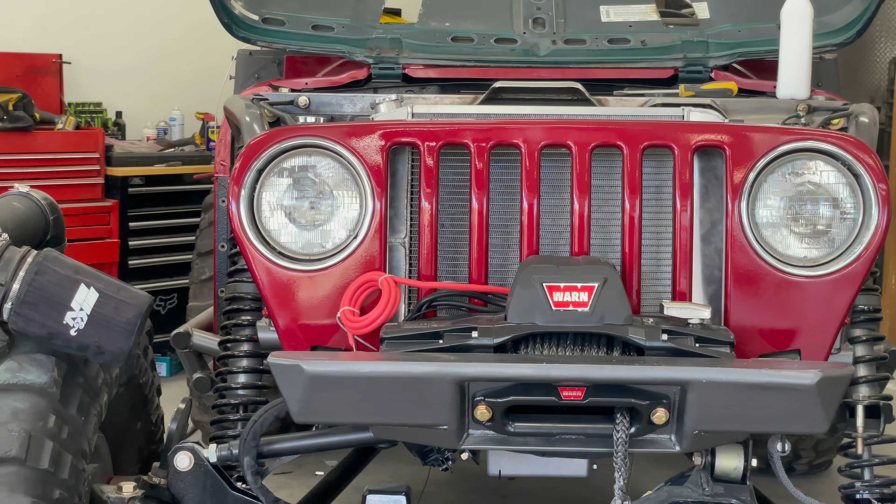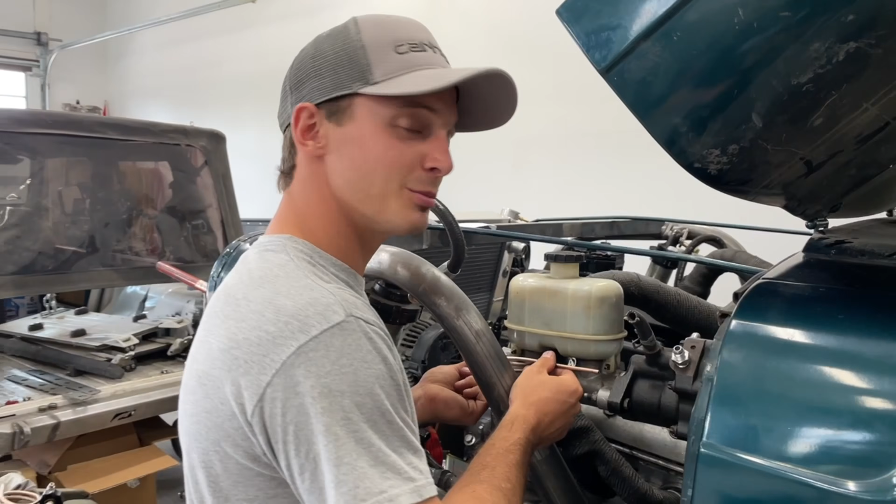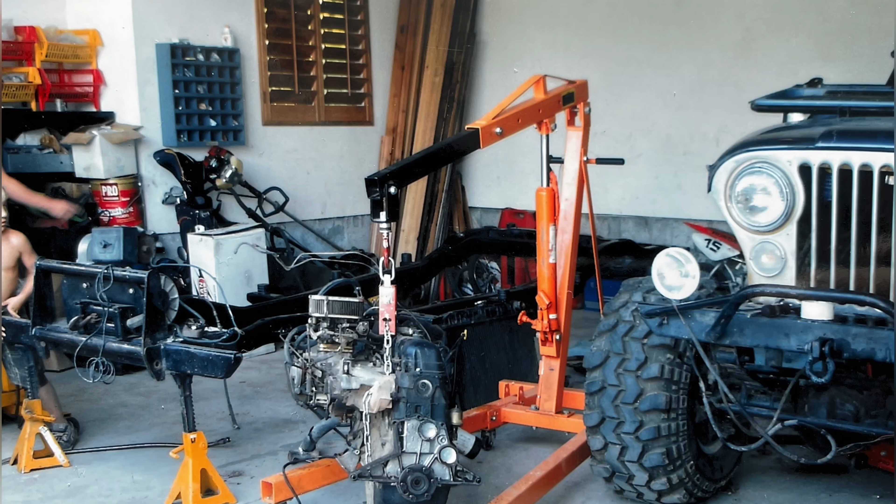My name is Caleb Peck, and these are my two brothers, Brady and Alex. We were raised in the back seat of a Jeep, and ever since we were little kids, we've been obsessed with anything that has to do with off-road. Since we were old enough to turn a wrench, we've been building our own Jeeps. All the building, buying, selling, and wheeling has kept us close through the years. So here we are telling our story in hopes to inspire others to get off-road. You're watching Peck Brothers.

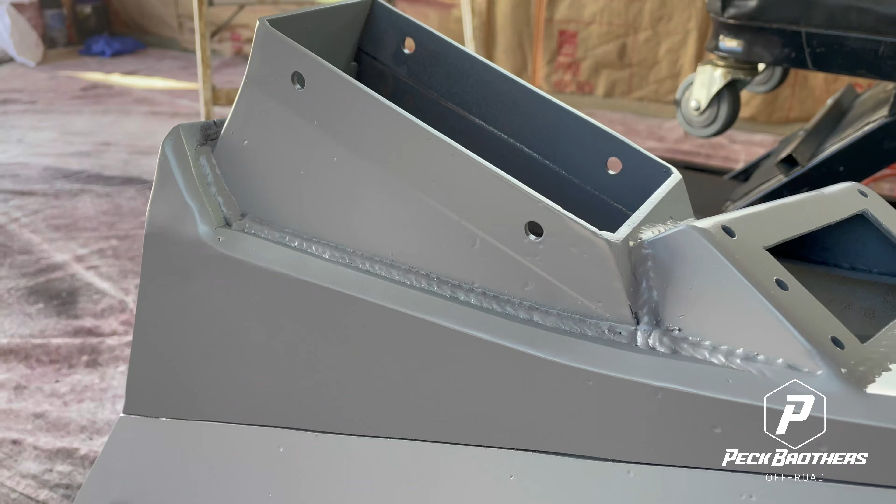All right everybody, it is day 16. There's 16 days till we leave for Moab, Utah. I'm working on this center console. She's primed, but I gotta do some body work. There's a couple little places you can tell where there's some imperfection in the steel, and right here you can tell. So I gotta fill all those with some of man's greatest creation, Bondo.

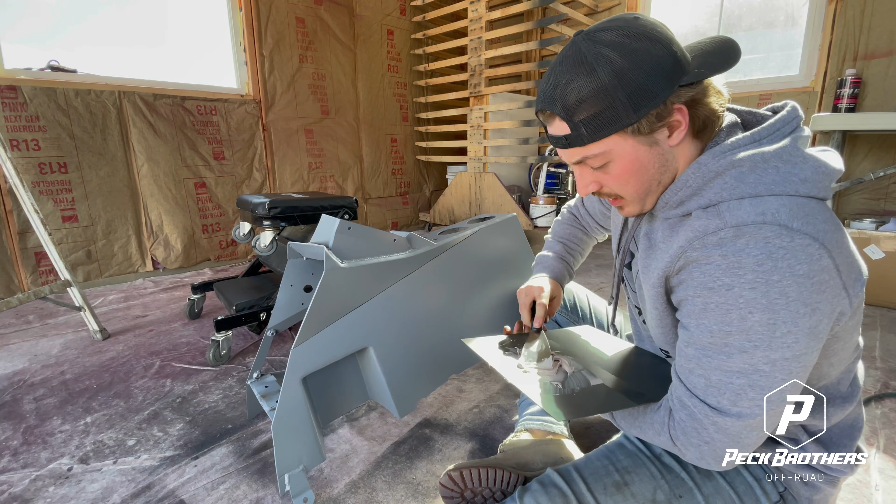This kind of makes me feel like Bob Ross. The only difference between me and Bob Ross is Bob Ross knows what he's doing, I'm just showing you what I'm doing. This ain't a how-to, this ain't nothing, I'm just showing you what I'm doing here.

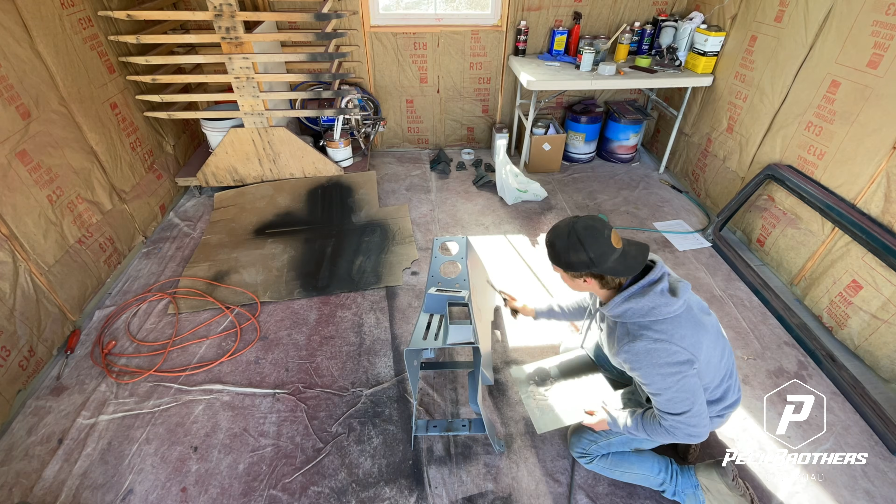Well, while this thing is drying, I guess I don't really know what you call setting up. The Bondo has to harden so I can sand it. While that's doing what it's doing, I'm gonna go work on the Jeep.

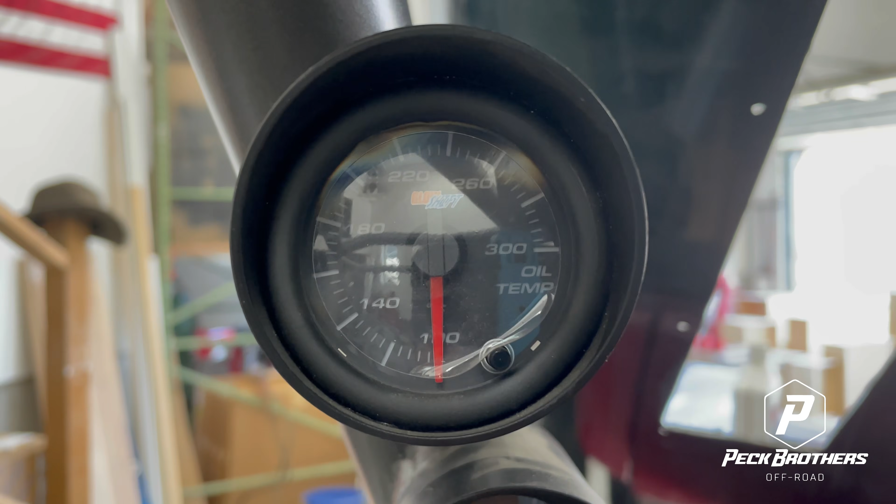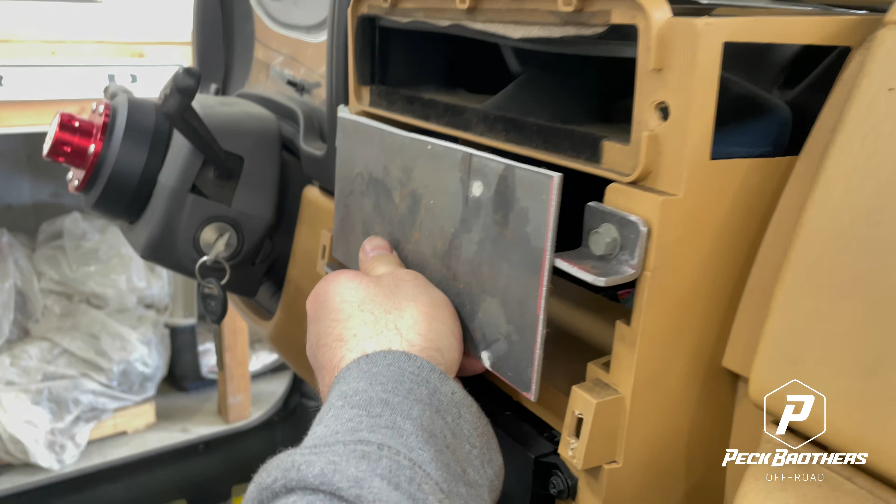So I have these stock gauges here, and I have this one here, oil temp, tranny temp, and air pressure. I think I'm gonna put more gauges in here, so I gotta build something that'll be able to house three gauges in here. I made these little tabs, they're gonna hold this piece that I made, and then another piece of aluminum is gonna bolt to this. So I gotta get this in place and tack this on.

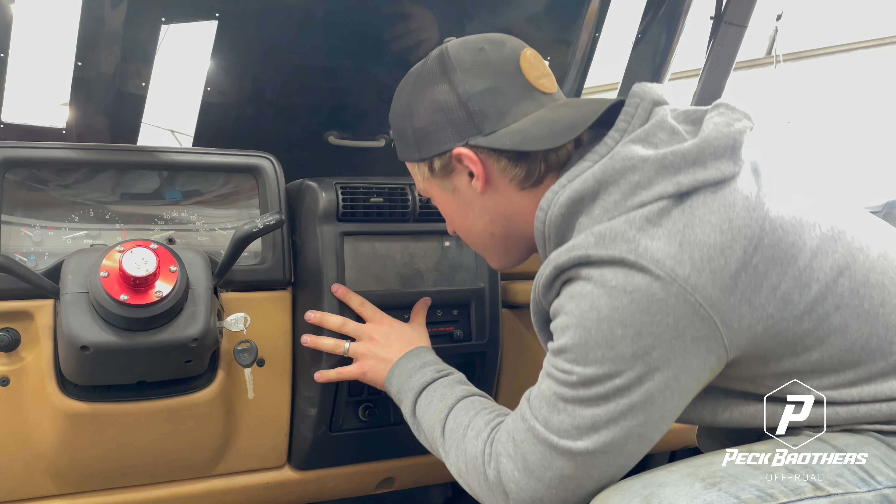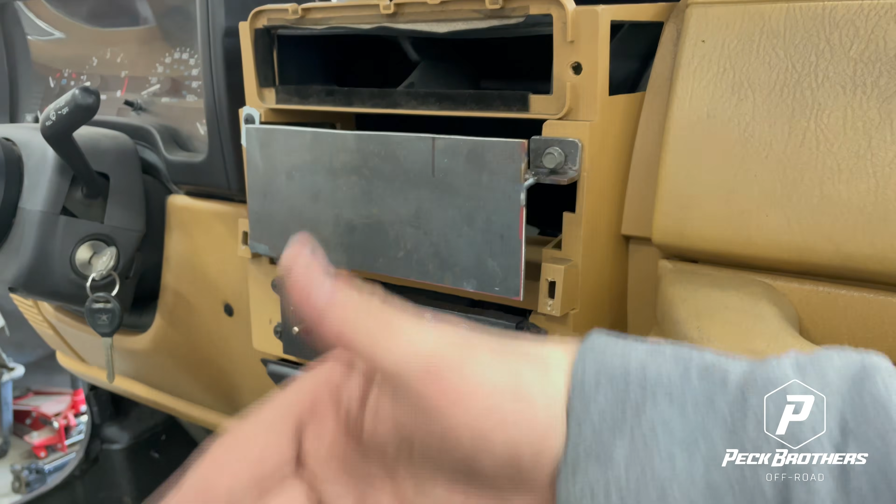Perfect. So now I just need to make an aluminum piece that goes right in this bezel here, and then I'll hook the aluminum piece to this so I can take it off without having to pull this whole entire bezel off. It makes it a super big pain if my center console's in and I need to get to these gauges and pull them out. I want to be able to pull this whole panel that holds the gauges out, so I gotta make this aluminum piece.

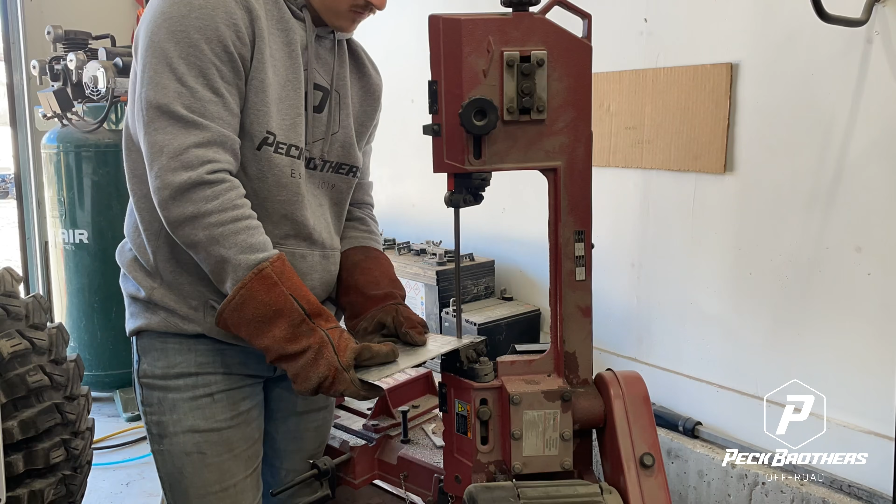Tomorrow. I got pulled away from the Jeep yesterday, and I know crap like that can't happen, we're past being able to do that kind of stuff. It is what it is. We are 15 days today, 15 days until this thing has to be going.

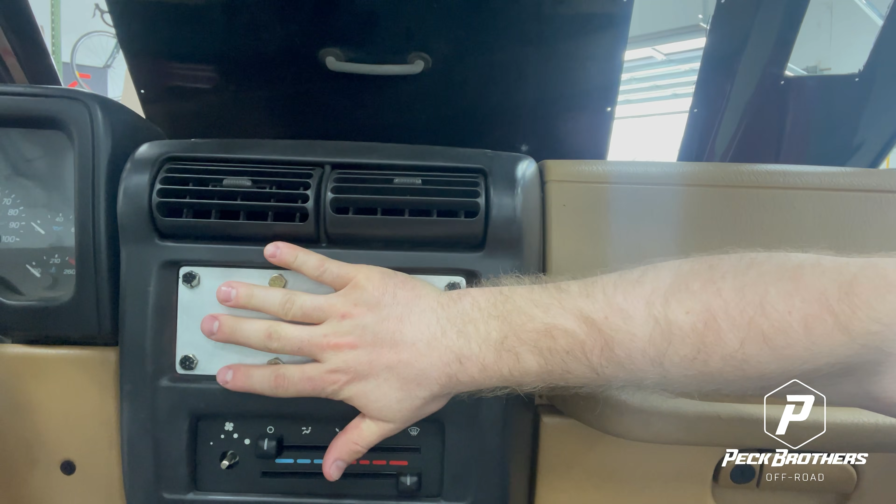I did get that aluminum piece made, I did get it in. I drilled these holes back here behind so this aluminum piece can unbolt from the steel piece and come off that houses the gauges. It makes it so I don't have to take this whole thing off every time I want to pull the gauges out and deal with the wiring.

So the center console can go in and this thing doesn't have to come out every time we want to pull the gauges out. That's good news that that's done, I've been real tired of dealing with that. That's a super good thing we can check off the list, it means we can put that center console in and it can stay in. The center console is dry, the Bondo is ready to go and ready to get sanded.

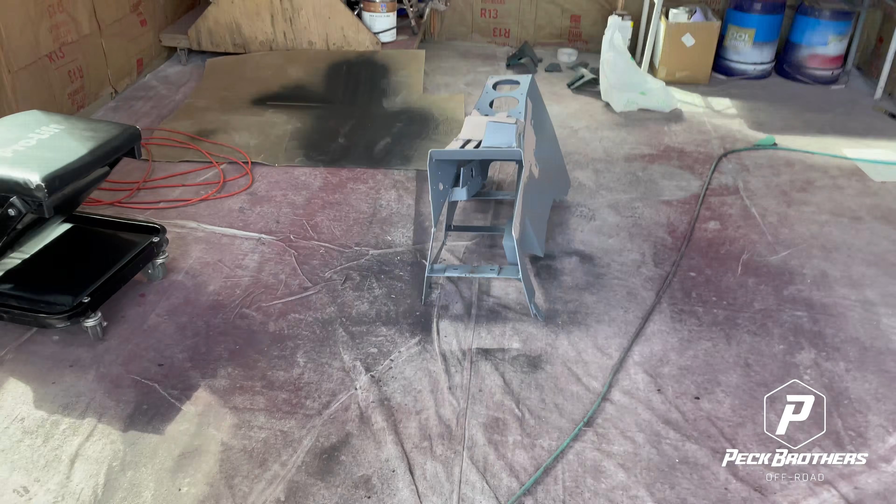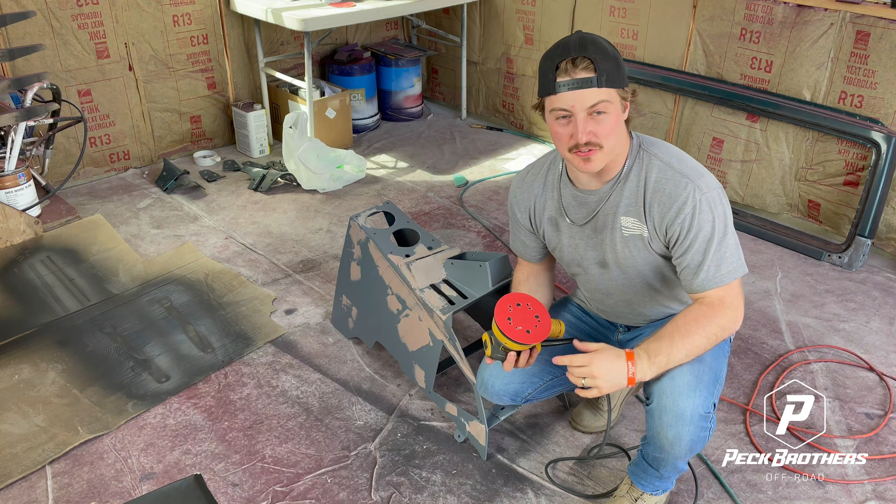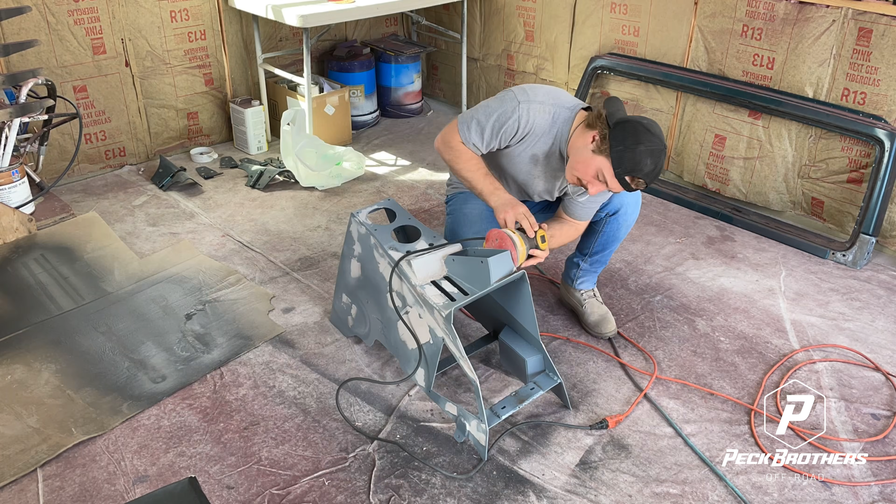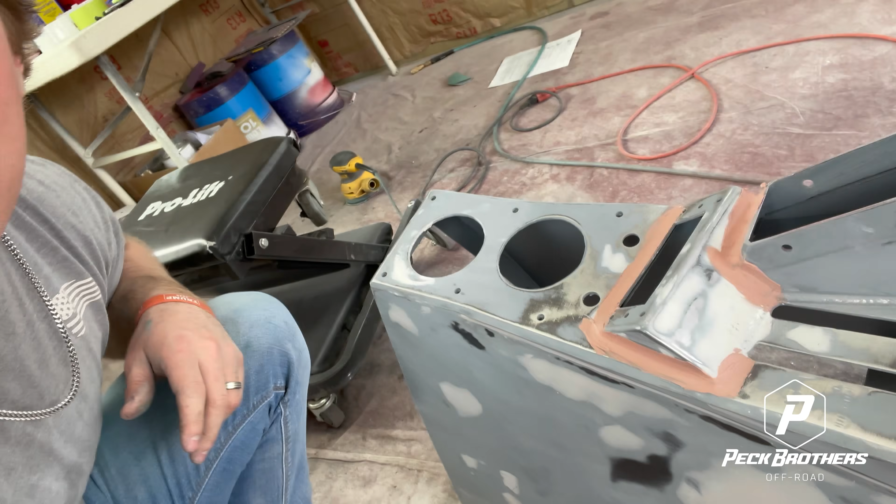We're all sanded, and I threw some more Bondo on here, just in a couple of places where we needed it. I'm gonna try and make this look like it's part of the original top. I've just been kind of waiting for that Bondo to set up. Started sanding these brackets that hold the windshield, these ones that hold the doors, and I set these up, and they're just hanging out on some baling wire. But these will be ready to put primer on as well.

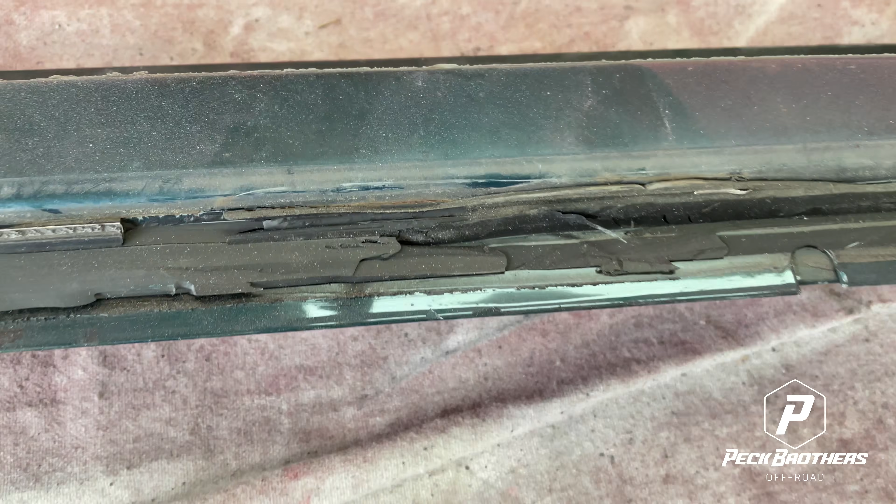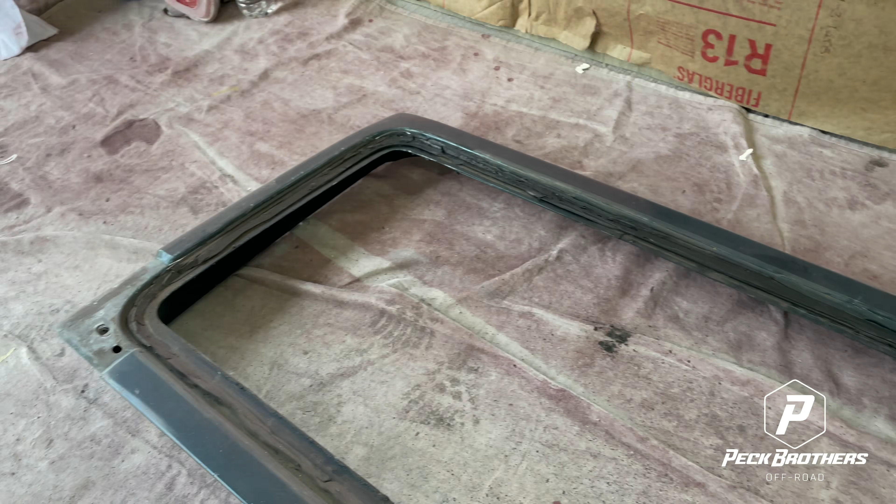I have my windshield frame that I need to put some primer on too, but it's got problems. I pulled the old windshield out of it, and this is the old remaining glue. It's just ridiculous to get out, and it goes all the way around here. I think I'm just gonna sit and try to get it off with a razor blade for about 3 hours. That's pretty much what I'm gonna be doing for a while.

Yeah, that ain't gonna work. Here we go, right here. Here's this chisel. Oh, that's way better.

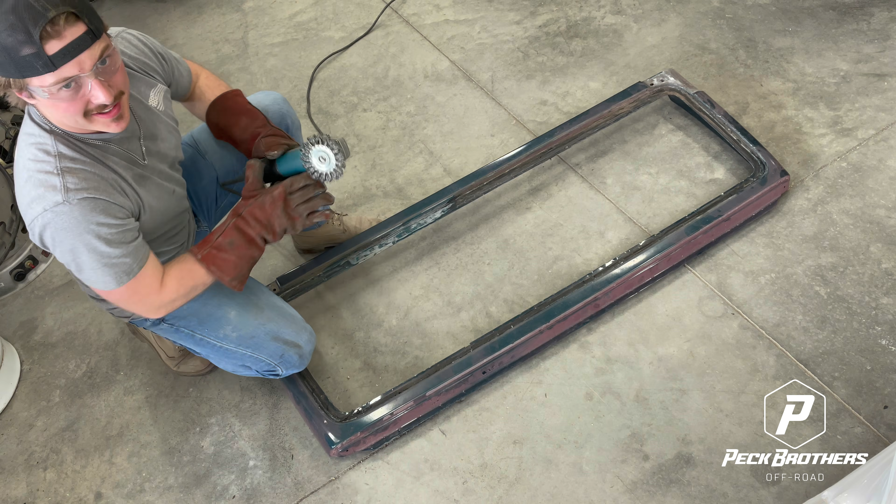Razor blades, pure dirt. I ain't doing that, not even a little bit. We're not cavemen, we have technology. I ain't joking around anymore. We got the wire wheel here. Not messing around anymore, that razor blade stuff ain't cool.

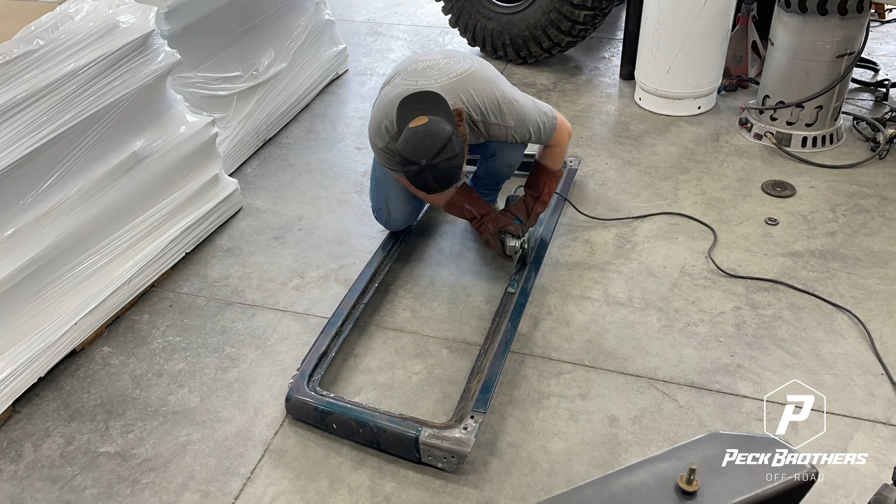Man, that took forever. Now I just gotta sand it. I gotta get some of the double-sided foam tape off the top where the bracket mounts to hold my soft top on. Gotta get an eraser wheel really quick, zip that off, sand it. It should be ready to go.

This right here is what I gotta use this eraser wheel for. It's really not wanting to come off. These things here, this is an eraser wheel. If you've never used one of these, go get one. They are so nice, you can take stickers, decals, anything sticky off of them. And what's nice is it doesn't hurt the paint, you just go really slow. I don't even know what it's made of, but it helps a ton.

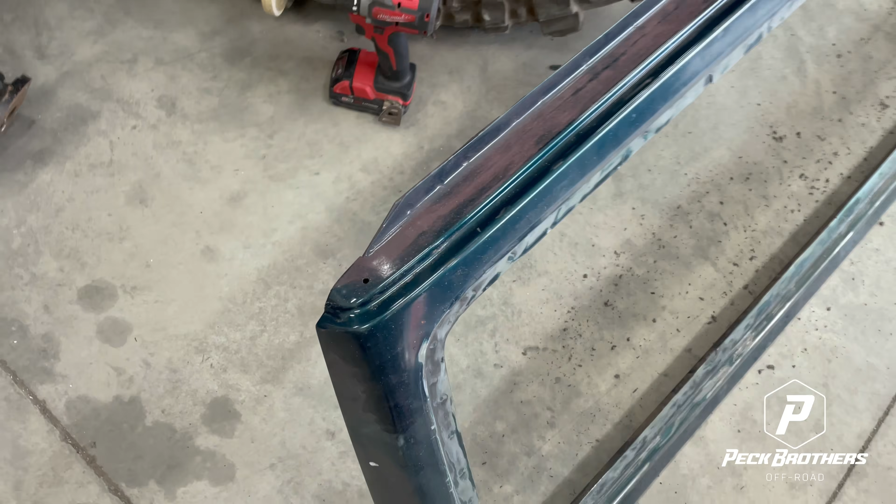Turned out super, super nice. Didn't scratch or anything. Now it's just time to clean it up and start sanding. Later - so I finally got this whole thing sanded, and now it's dark. That was a pretty serious thing getting checked off the list. Now it's ready for primer, and we should just only have to wet sand the primer one time.

Brady decided to come out and do an alignment on the Jeep because he's a saint. I love you, man, but I don't really know what's going on, so he's got to explain what he's doing.

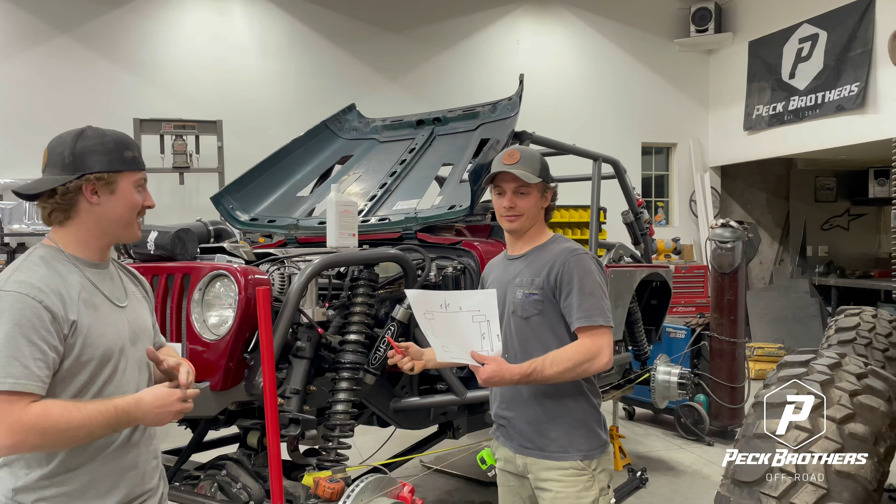Caleb needs a lot of help, not just with his Jeep, but I figured this is where we should start. Come on, I've done one of these before. I can't say that it worked real well. What was it on? An old truck on the reservation. Are you serious? Oh, yeah. But, you know, I learned it, and this kind of works.

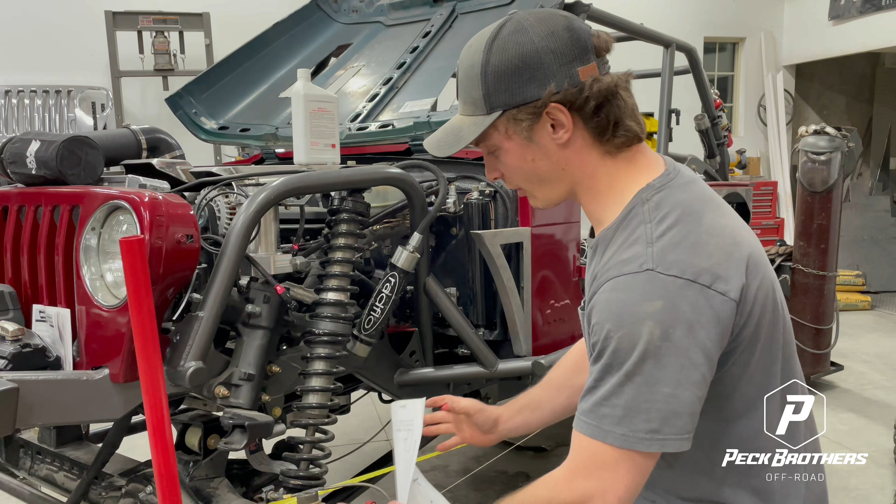For the people that don't know, our axles, front and back, are able to move probably about an inch back and forth with the twist of these link bars. They have adjustment in them. And what that is, they have to be adjusted right, so when you turn the wheel and then you let go and you go straight, it'll want to come back to center. It won't wear your tires unevenly.

And, you know, it tracks down the road straight. Some people, if you've ever seen a truck going down the road crooked, like crab walking, that's usually what our Jeeps look like, but hopefully this one isn't doing that. But that's the long and the short of what an alignment is - basically to get your vehicle to track perfectly straight down the road, so your steering wheel doesn't fade one way or the other, and it's going perfectly straight.

So what we've got is we're trying to align the whole Jeep up, and it's hard for a reference point on a brand new build to get that exactly right. So what I decided to do - and listen, there's probably a lot of people that know how to do this better than us, but this is a way that makes sense in our minds, so this is what we're doing.

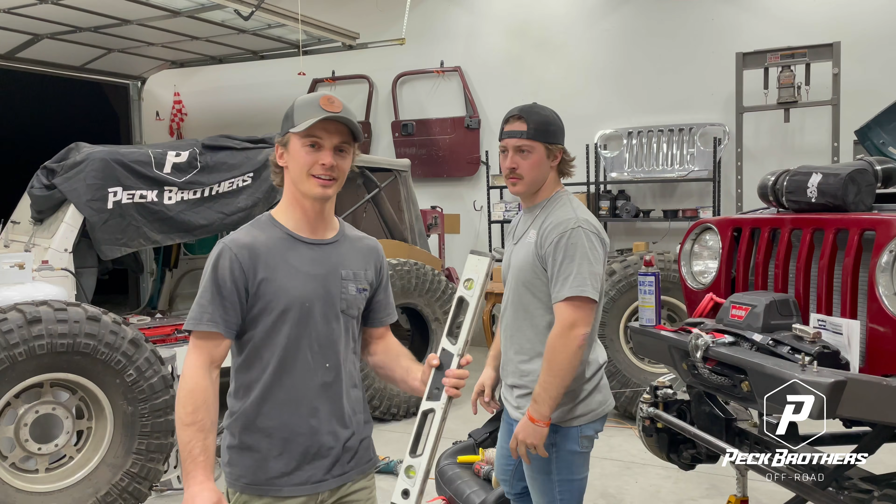Thank goodness we got Brady. He's always the guy that's writing this kind of stuff down, figuring out, doing math and stuff. I just build crap. The nice part about being the older brother is they think that I know what I'm doing. He's been around longer, so he should know what he's doing.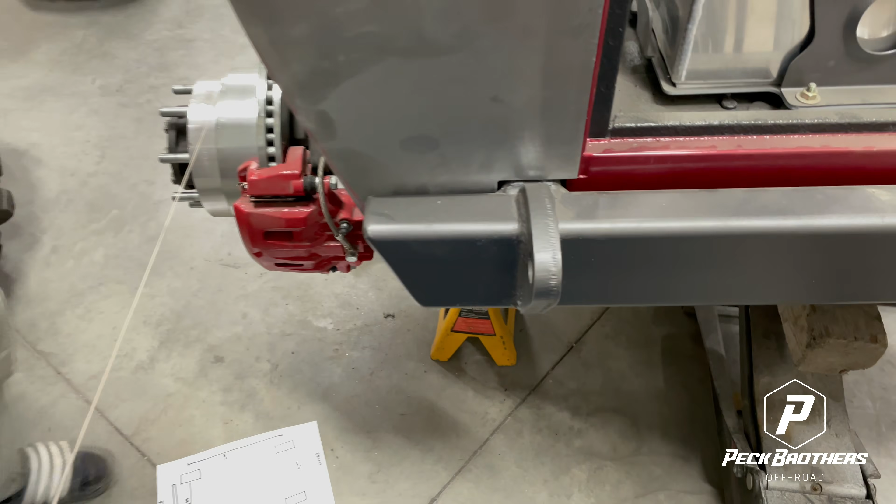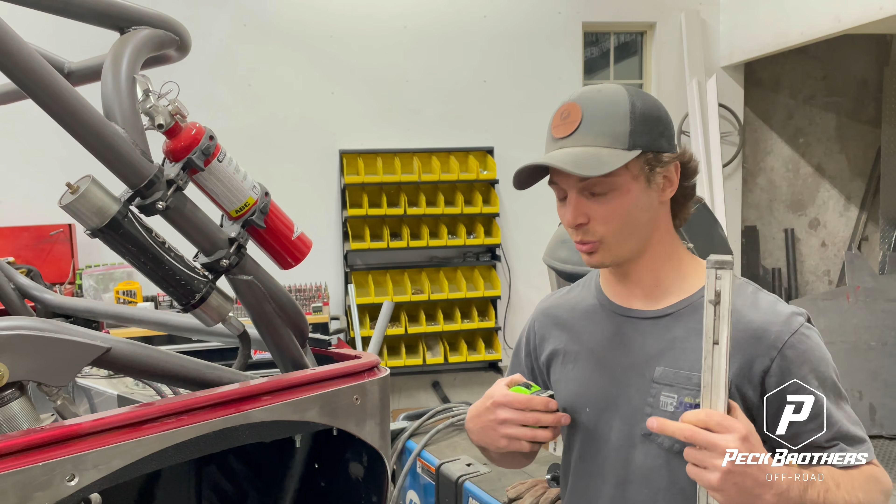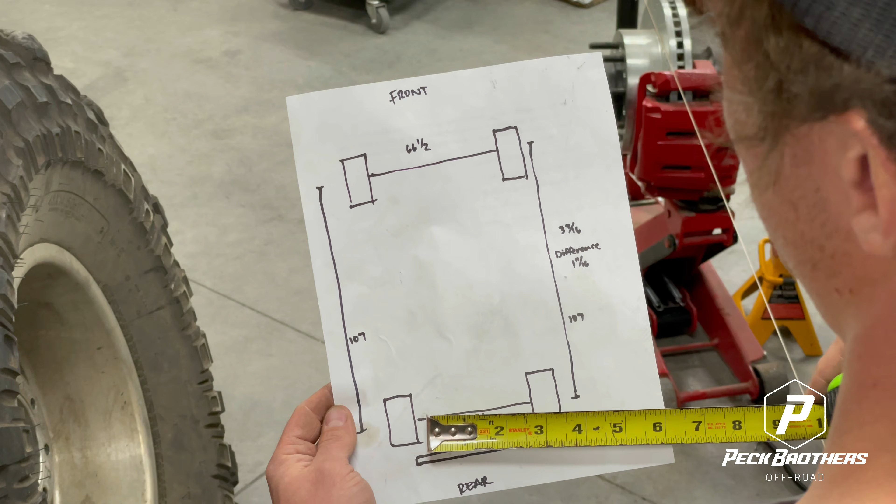So here's our front axle and our rear axle. Now that this is running parallel and true to the Jeep, we need to equal out the front axle. So we measured from tube to tube, and it's 107 inches. This one was 106 and 5/16. So we adjusted this side to get it exactly 107 inches.

So what we gotta do now is make sure that this axle is headed exactly straight with this frame. What we did was we just took and measured off something that's the same on both sides up to the inside of our frame on each side. Hopefully that makes sense. If it don't, DM us and we'll explain it better. Yeah, that didn't make a lot of sense, but you know what I'm saying.

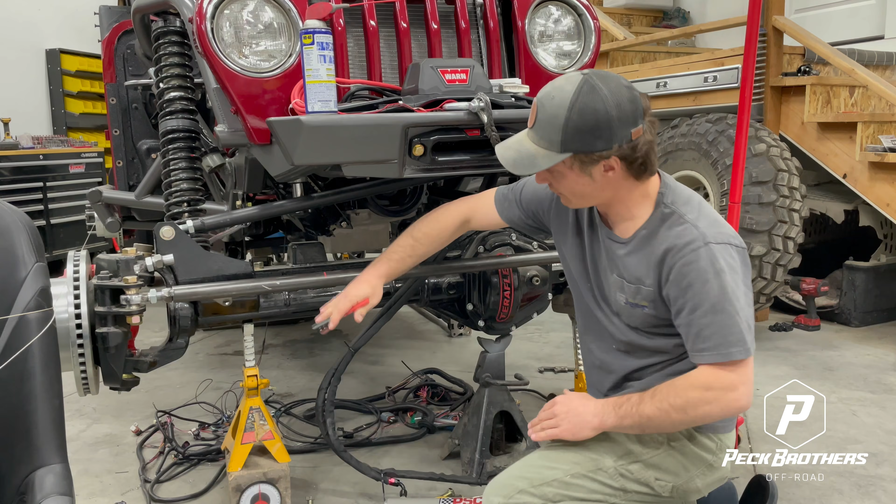We just gotta make sure that this is running exactly centered at ride height. So the arc of this track bar is going to depend on how much this axle moves back and forth. If it was on a steeper angle like this, when it comes up, it's going to head that way - the axle will do this with the body. So this is on a little bit of an angle, and we're running about 6 inches of up travel. That's where we want to be.

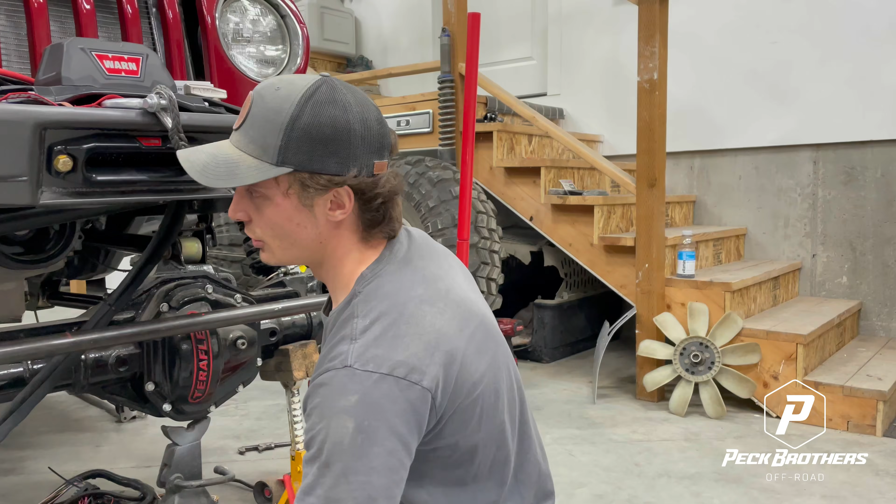So this is where we're gonna mock it up so everything's straight. We found out that his track bar, when Cave mocked it up at first just to make sure everything fit and we had the right bolts and all that, we ended up being 1/2 an inch too short. So what we had to do is unthread this heim to center that and split the difference of our 1/2 inch, which is 1/4. And now it's running perfectly straight.

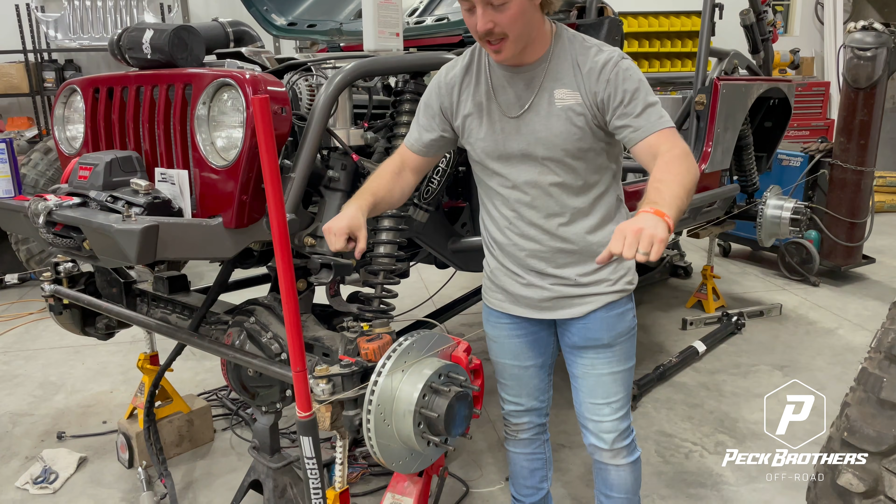What we're dealing with now is we're trying to get these front knuckles to run perfectly straight down the road. It's basically like if you had a pedal bike and you were trying to go straight and you turned the wheel, obviously you're gonna turn. On this Jeep, if they're kicked out, you're gonna break traction as you're trying to go straight. We want them perfectly straight so we can go right down the road and everything is perfect.

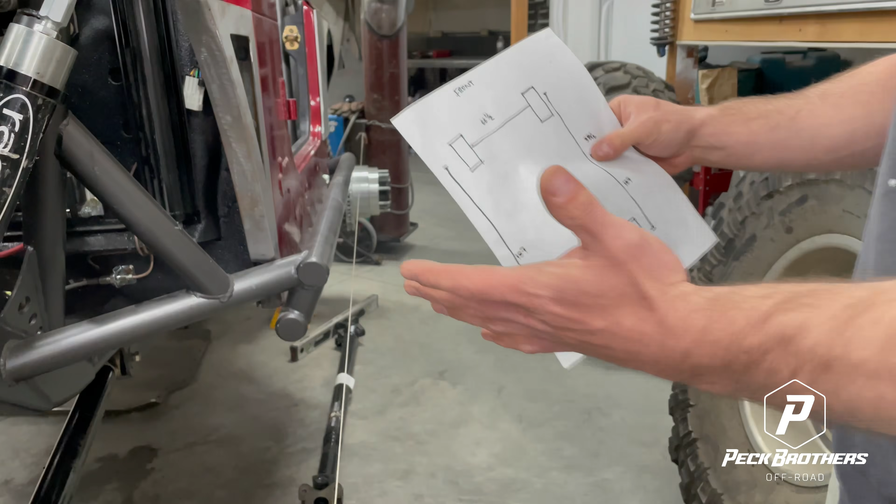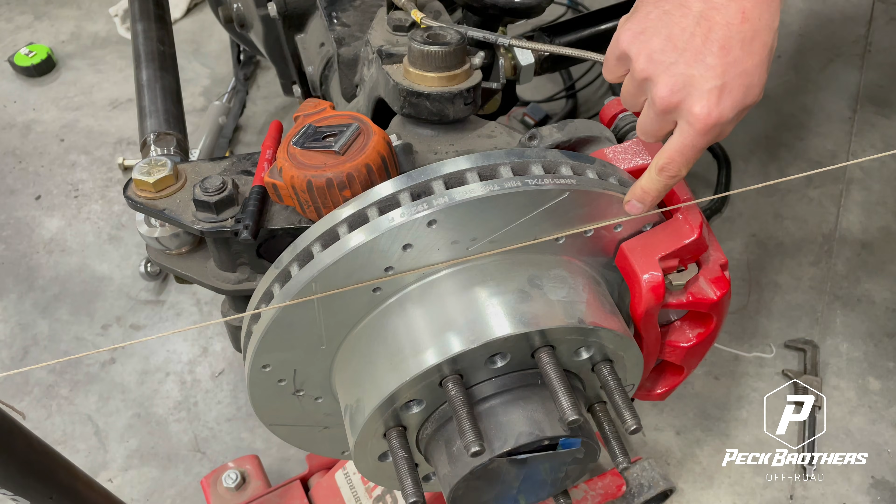So the way that we're gonna accomplish this is we've got our string. This whole hillbilly setup you see here actually has a purpose. The tricky part I'm gonna try to explain is this: our front axle is wider than our rear where we're going to be measuring. We have more surface area right here to measure off of from our string. So we're gonna measure on this, which is not the wheel mounting surface, it's the outside of rotor surface, from there on the front and the back.

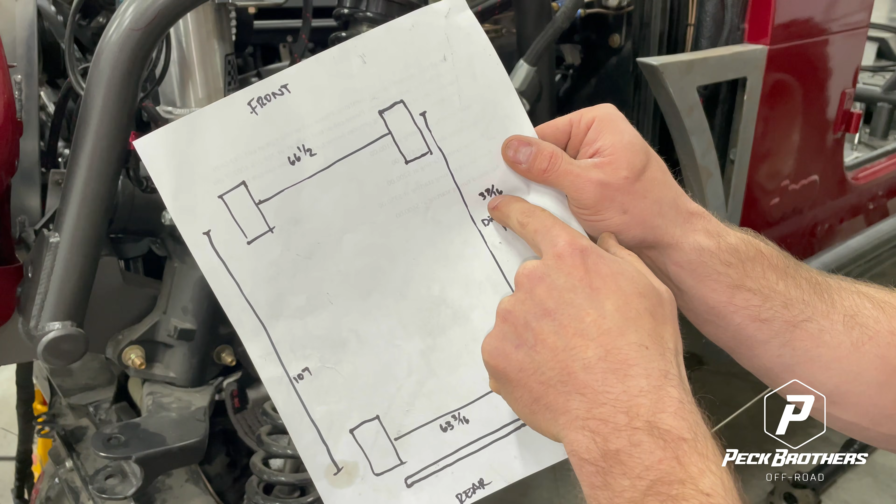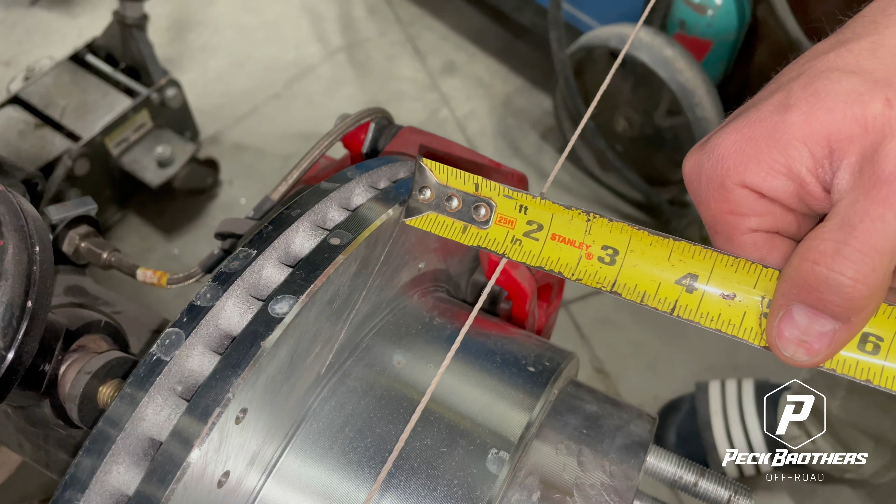The measurement on the front axle is 66.5, the rear is 63 and 3/16. So the difference of those two is 3 and 5/16 inches. What we have to do is break that in half, so that's 1 and a big 11/16. Right here we got this mocked up on the welder, and we got it mocked up there on the jack handle. You just find 2 things that are gonna hold up nice and not gonna move. What you're gonna want to do is get it exactly straight, which is right in between 1 5/8 and 1 11/16 on the back side of the rotor as well as on the front.

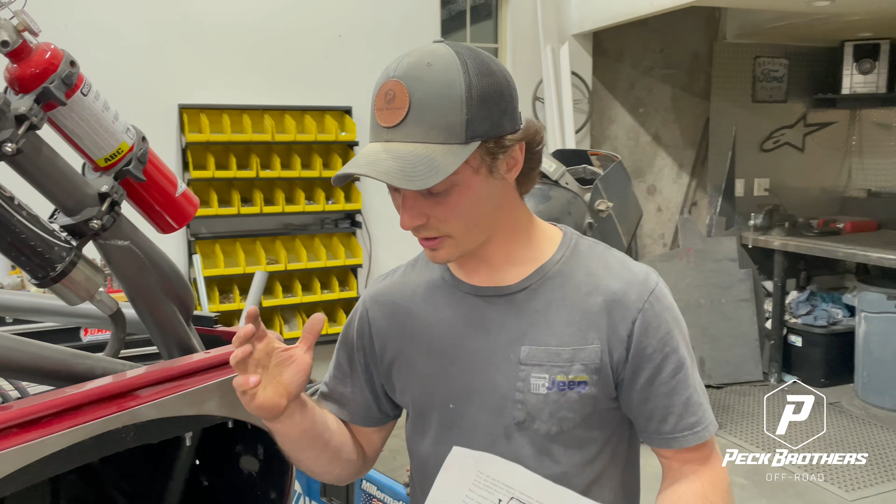They're the exact same measurement. If we were running the exact same width front axle as the rear, this would be touching the string, and it would be headed exactly perfect in line with this string. You remember us saying that the rear axle is narrower than the front. That's why it's away from this string.

So what we have to do on a Jeep is we use this wheel adapter to make up the difference on the front. So from this edge here where the wheel mounts, on this side and that side is going to equal the width of the front axle.

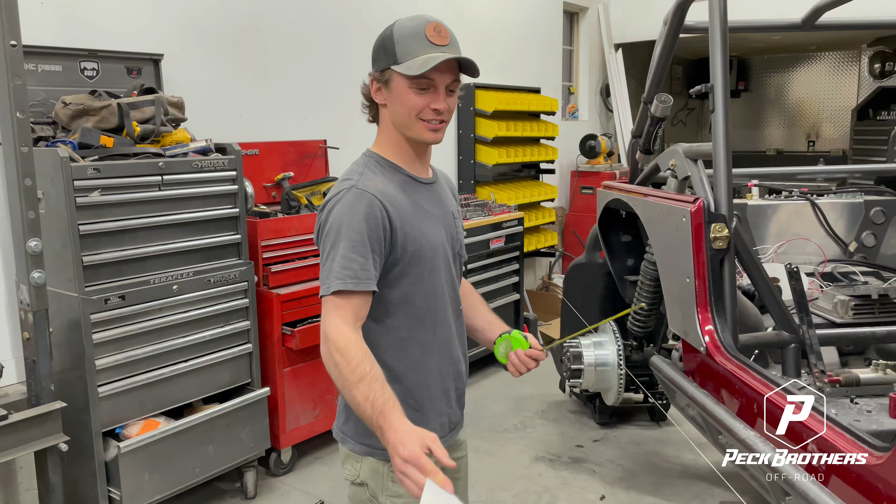So now we're gonna check our other side here, and we're gonna go 1 11/16 on our brand new tape measure here that you can see so nicely. I let Caleb borrow this for a day, it was brand new. I'm gonna kill you. So this is all set up exactly perfect.

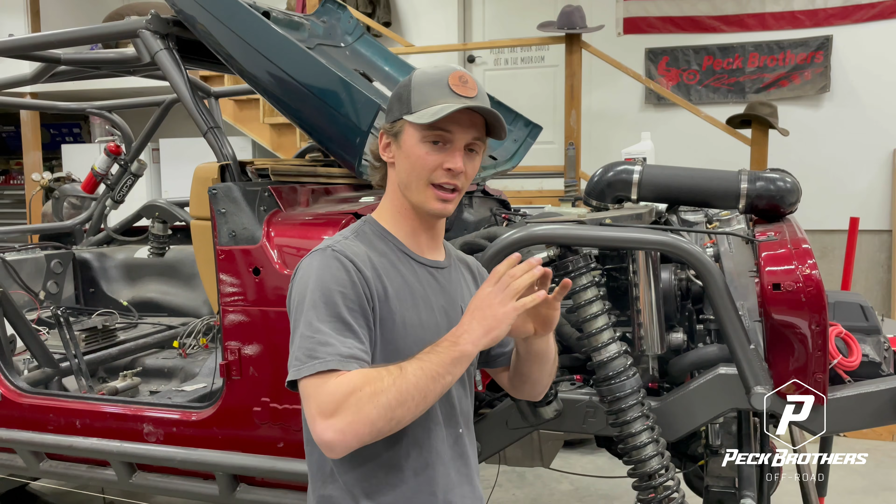Now after all of that is done, what we have is a perfectly straight, parallel running front end and rear end, along with the chassis. Now this is gonna kind of throw you off, we have to kick in the front tires 1/8 of an inch, which is what most people recommend doing in an alignment. It helps it track straight, keeps your steering wheel straight, and when you turn and let go, it wants to come back to center. We're gonna kick these in 1/8 of an inch, and our redneck alignment is going to be finished.

Later, ladies and gentlemen, it is day 14. It's getting close. I'm getting kind of worried.

Day 14, we've started it once. It ran for what, 30 seconds? We haven't put it in gear. No, hasn't been in gear still. We haven't cycled suspension with brake lines yet. No, we're still checking clearance. I mean, everything should - you say that. Brady's saying that like we haven't checked everything already. We've kind of checked most everything, gone over and checked, but when stuff gets tweaked, when alignments happen, stuff moves, who knows.

But tires are still off of it. Brady's helping me dealing with the steering and the alignment. So everything's good here. I've got paint going, I've got everything hung up, I've got primer sitting in the gun. We're really needing to get everything painted.

14 days, holy cow, I'm not kidding. Every day the stress keeps getting worse and worse because it's so far out. There is so much work that needs to get done, but all we can do is go as fast as we can and do as good a job as we can. We don't want to go down there and just throw it all together and have issues, be working on it all the time, I just hate that. So it's got to go together good, but we're trying to do a good job and do it as fast as we can. We just got to keep moving.

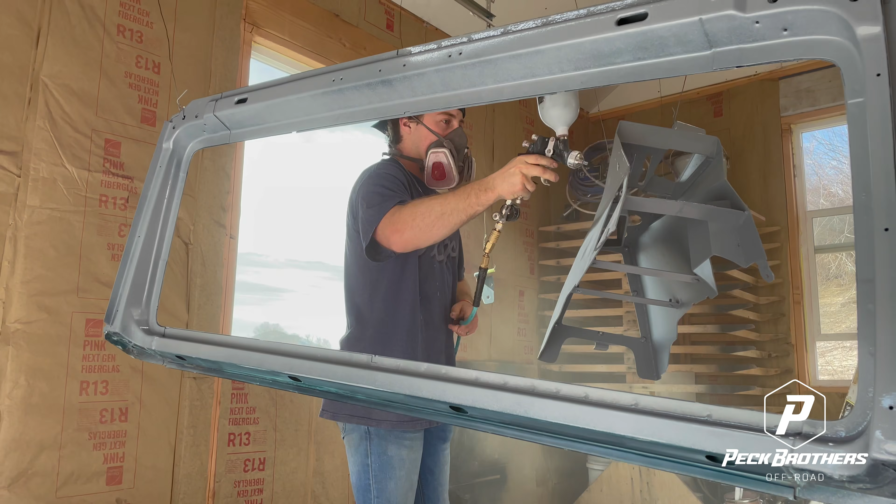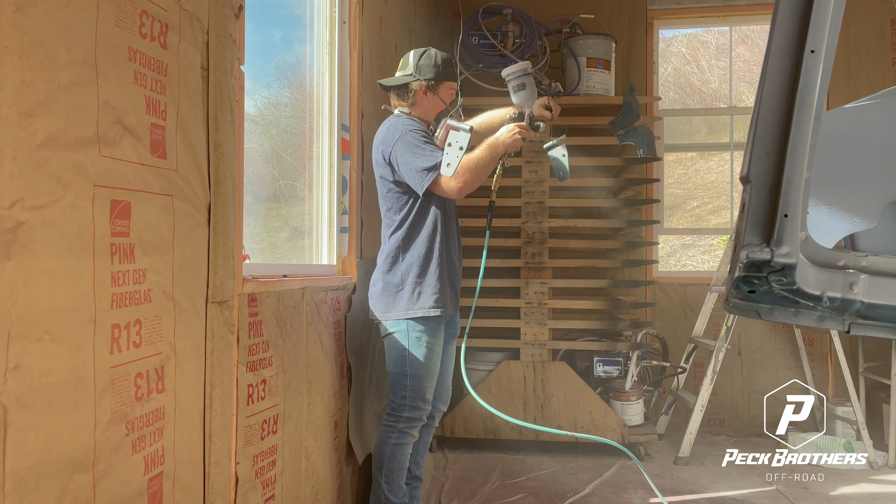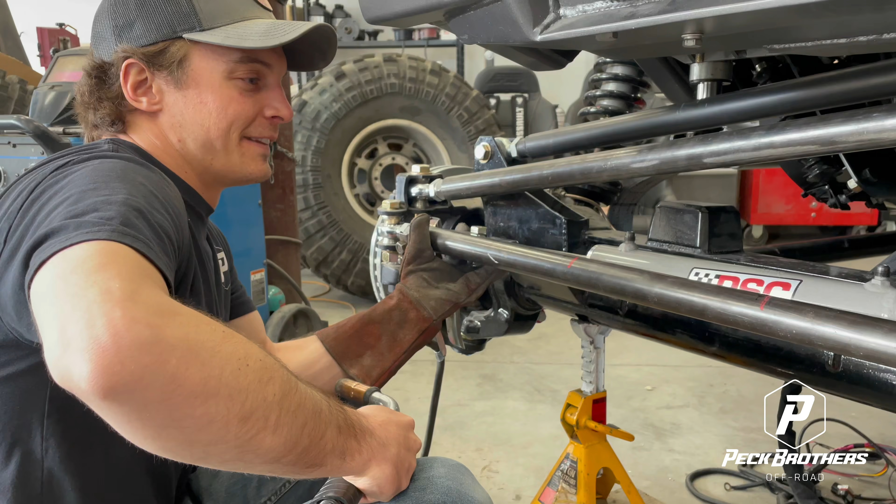Meanwhile, this is a huge checklist item. I've been dreading this job actually, just because we thought we had problems, but Brady thought we had problems. I put it on, so I knew it was perfect. But Brady thought we were having problems. Well, I hate to break it to you, but it wasn't perfect. Well, it was perfect enough. Good for Alex, yeah. It turned 55 degrees one way and 40, 35 the other.

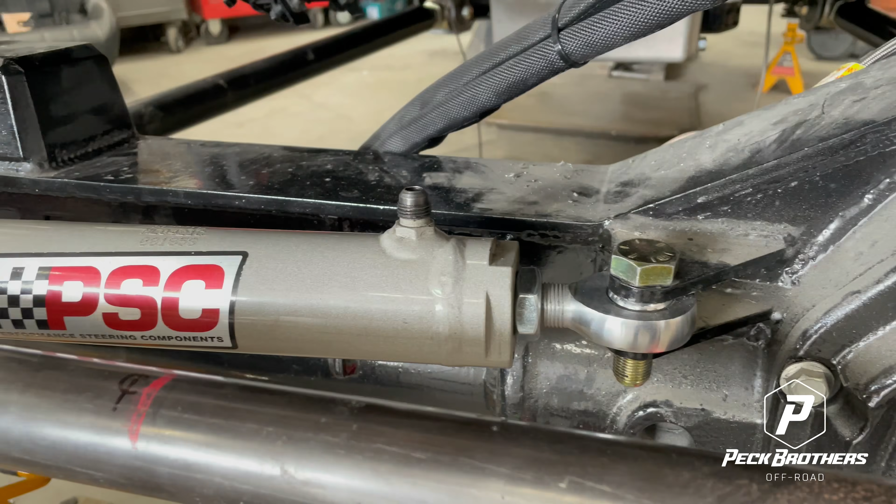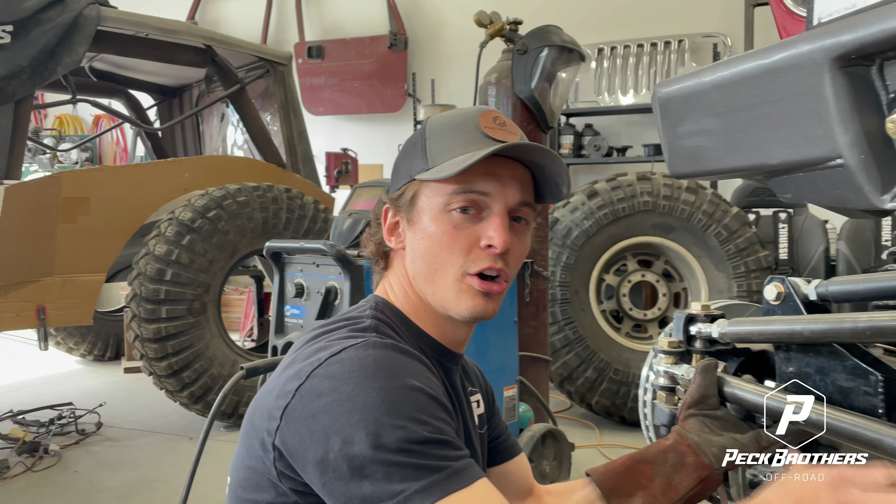Exactly, so we're mounting this ram. Well, that's already been mounted, I made that mount, but this was the side that was to be determined. And Brady's figured everything out. We're not a fan of those clamp ones that go on here because we've seen them push up against a rock, blow out, and start sliding around. A lot of people argue mine's been fine for 15 years, and some of them probably are, but we just want to wipe out that possible problem, make enough shimmy in our ram to adjust, but keep everything rigid so we know it's not going anywhere.

Holy cow, the steering is done because of this guy. This feels good, dude, it might make it. Check this out, the steering wheel is even straight. That's the very first Peck Jeep that the steering's been perfect, right, pulling out of the garage the first time. The alignment's done as good as it can be, with no machine. It's gonna steer all the way to one side and all the way to the other - 50 degrees of steering, every last millimeter of steering that this Super Duty's got.

6.5 hours later. Holy cow, guys. I'll bet some of you are probably like, dude, if your Jeep needs to get done that fast, quit making a video and just work on it. Well, that's what I've been doing, I've been on the grind, same with Brady, same with my dad. He's got all the steering painted, everything's tight, everything's all completely clearanced and set up. It's all welded together, the steering is completely finished, and tires are all back on.

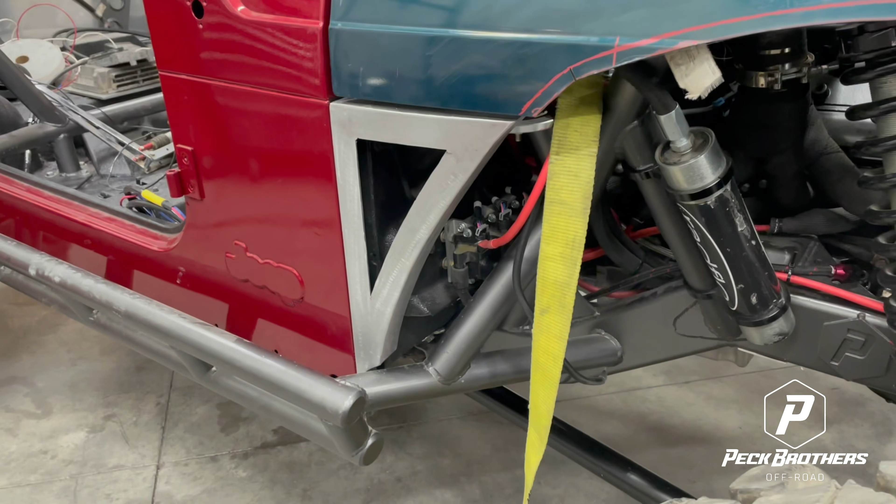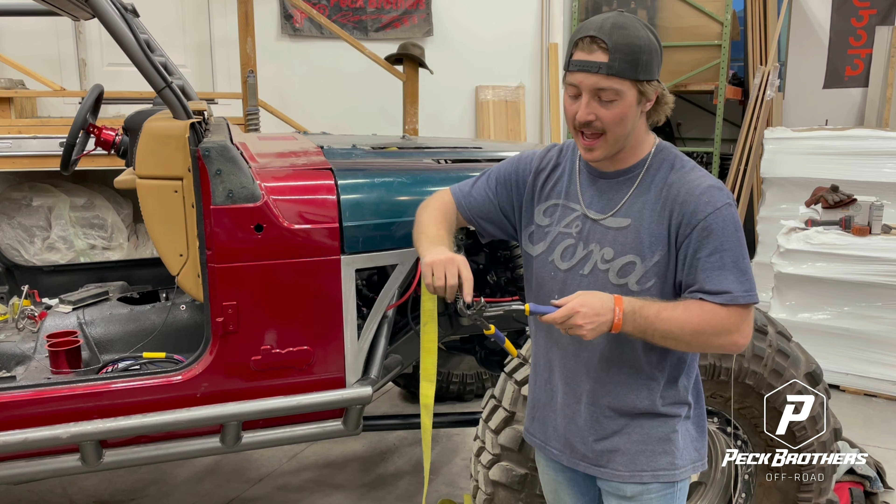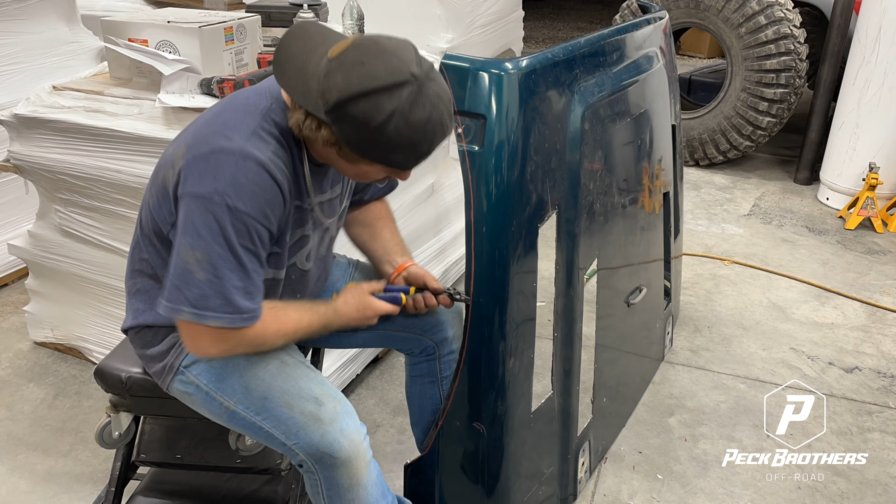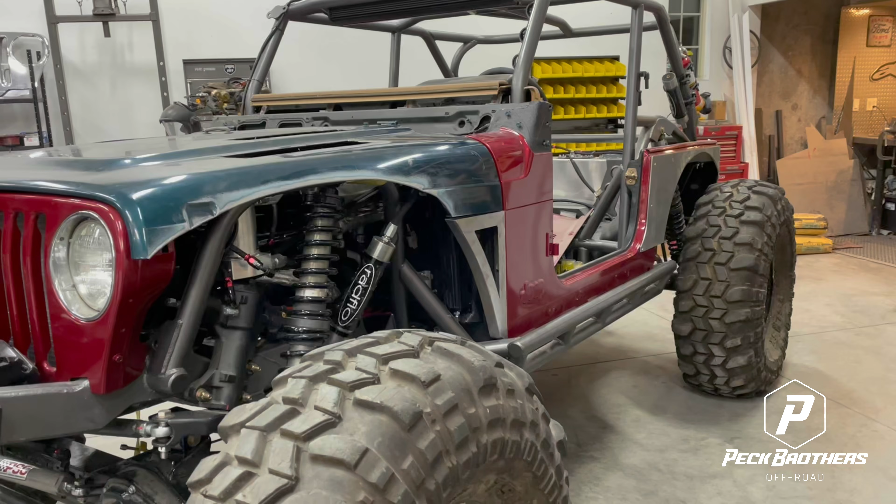So now what I have is I built this other fender really quick, I just whipped that one up. It's a lot easier when you've already done one. But this red line right here, that's where we want the top of the hood to be. So what I did is I took and cut about 5/8, because I'm gonna take these special pliers with a flat edge on these channel locks, and super carefully put the edge of these pliers on the mark, just like that. And just a little tiny bit at a time, bend this piece in, and keep doing that until pretty soon it's perfectly flat. That's how those ended up turning out.

Go see what Cabe's up to in the shed.

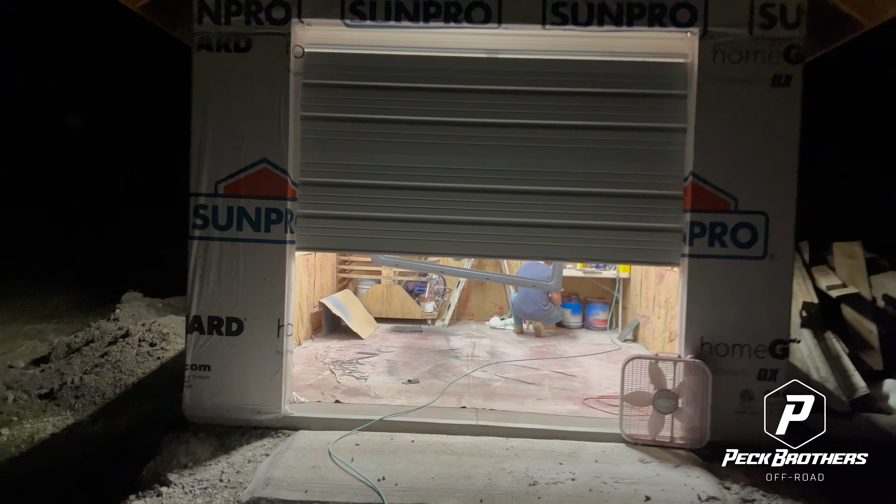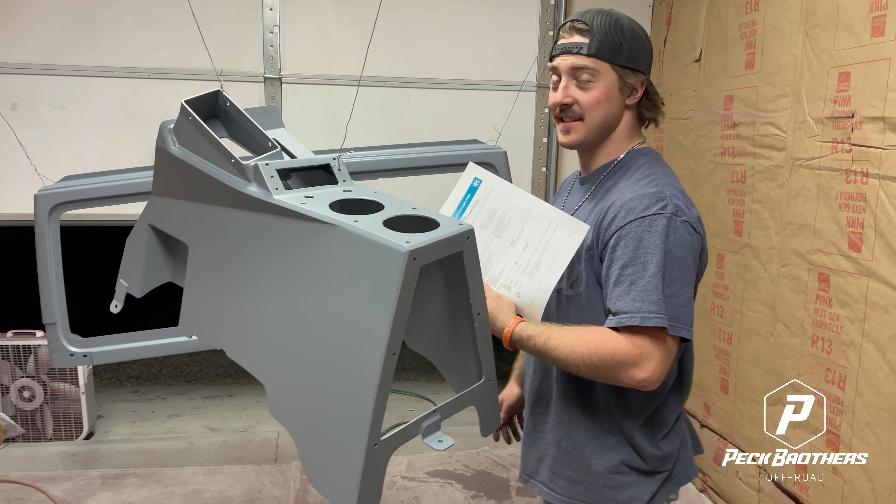I love this thing, it's gotta be done tomorrow. So I'm like, you know what, I gotta get red on it, I'll just get red on the rest of this stuff. We'll be able to put the half doors on too. Oh yeah, so we're just gonna crank it out tonight.

What happened to your shirt? Well, today while I was working on your Jeep underneath it, welding tabs upside down, I started smelling something really concerning. What did it smell like? It was burning flesh and a mix of smoke. I was like, you can't stop a weld once you've started, so I just kind of held it, and then I got done and looked down and it was on fire, so I started patting it out. It didn't burn me too bad, at least this one - I have a few other holes that are kind of smaller, but yeah, that's what happened today. We need to get you a new Peck Brothers shirt. Yeah, the thing that sucks is this is one of my favorite shirts. Yeah man, that's a ding. I don't know, that's what happened today, so I'd probably wear it tomorrow too.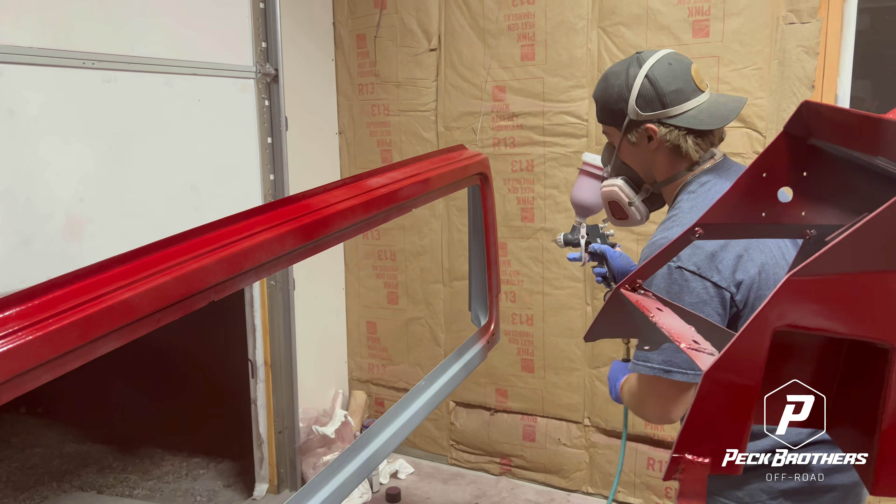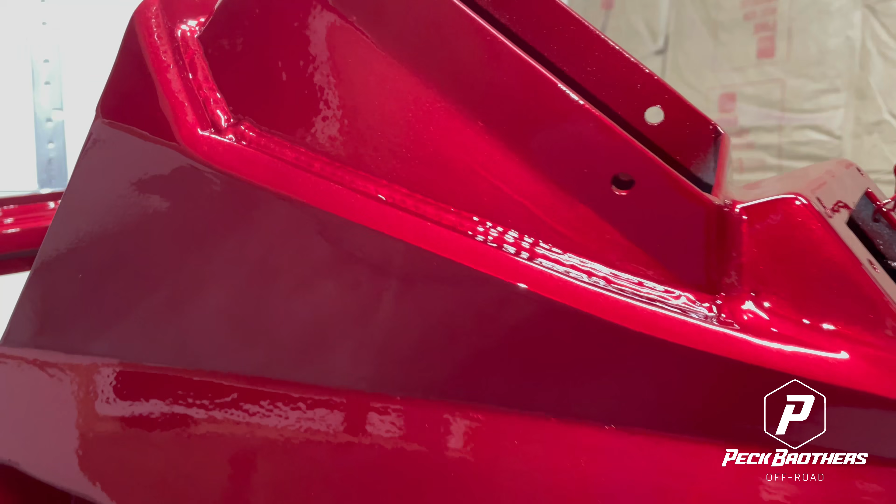Oh baby, woo! Holy crap, it is just after 1 a.m. and everything is clear coated. The whole place is aired out of all the overspray. Man, I got a couple good coats on here, nothing ran, which thank goodness. I really don't know what I'm doing - this is the very first thing that I've ever painted as far as cars go in my whole life, but I'm just so excited about it. So this is color matched to the center console.

That's it everybody, it is day 13, it's 1 a.m. and it's day 13. We got a ton of dang good stuff done in the past couple of days. Thank you guys so much for watching.